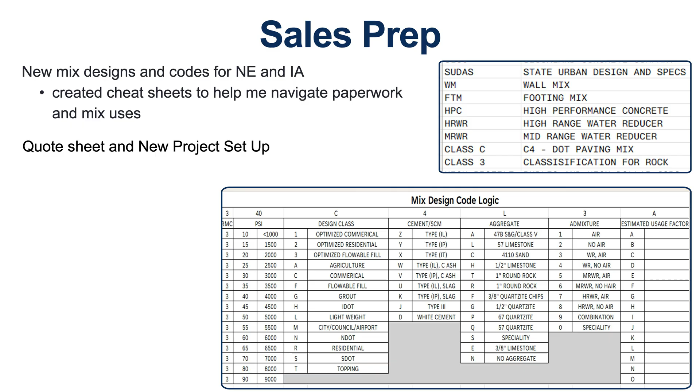So I created some cheat sheets. The one on top is just a small Excel sheet I made for myself to reference back to. The bottom one is what our quality control manager gave me to learn about the mix designs. And I got to spend a little bit of time in Omaha with the sales and estimating team.

I got to bid some jobs, go see aggregate sites, meet with some contractors in the metro area, talk about different sales strategies. How do we do sales in Omaha versus how do we do it in Sioux City, since they're 2 different size markets. One of the projects I got to be on was the Omaha streetcar.

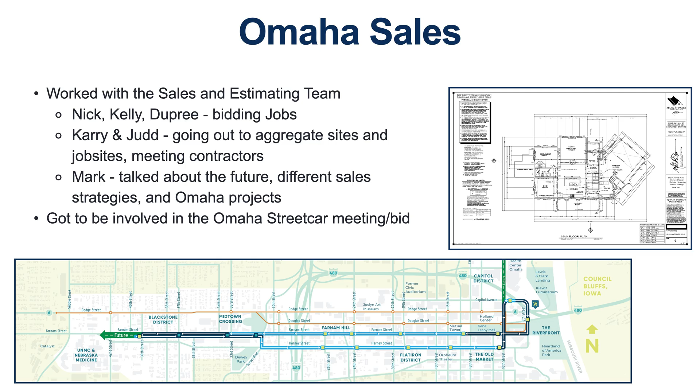It's kind of a little trolley that goes through the old market area. I got to sit in on that meeting, help Nick, our lead estimator, bid the job. So that was something cool that I maybe wouldn't get to see in Sioux City.

I spent some time in Gerhold sales, which is part of the rural division of Lyman-Richey. I spent 2 days with Carrie and Chuck. We got to drive around to different job sites, meet some of the different contractors. These were some of the cooler jobs we got to go to.

One of them being the chicken barns for Michael Foods—they're putting about half a dozen or so chicken barns up. And then the Norfolk River project, which is pretty much downtown Norfolk. It's a little canoe area where you can canoe, kayak, paddleboard—pretty cool thing to see. And then the Columbus Community College.

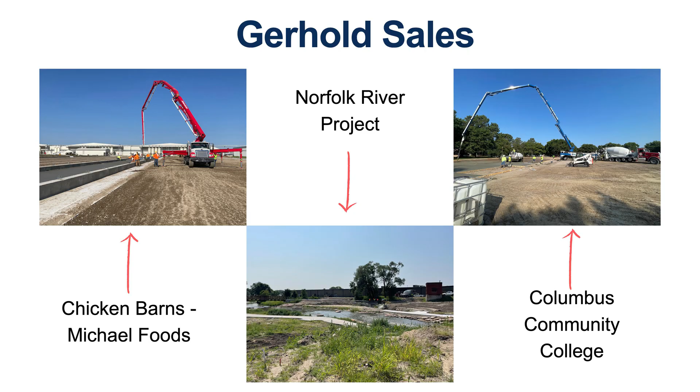Since I was based out of Sioux City, this is just a couple of the paving jobs I got to be a part of. As you can see here, we do have 2 different paving mixes. The difference in them is the different water reducers and then the different spec for slump. So your handwork is obviously going to be a 4, and your paving is a 2.

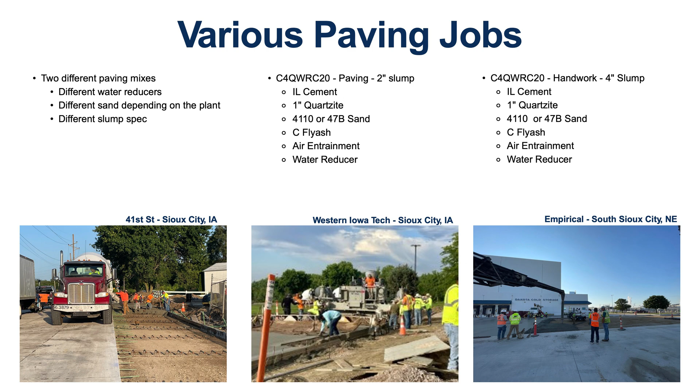Something I learned was that there's different sand depending on which plant it comes out of. If it comes out of the Sioux City plant in Iowa, it's going to be your 4110. And if it comes out of the South Sioux plant, which is in Nebraska, it'll be 47B. So even though it's the same area, it's 2 different sands with 2 different state regulations.

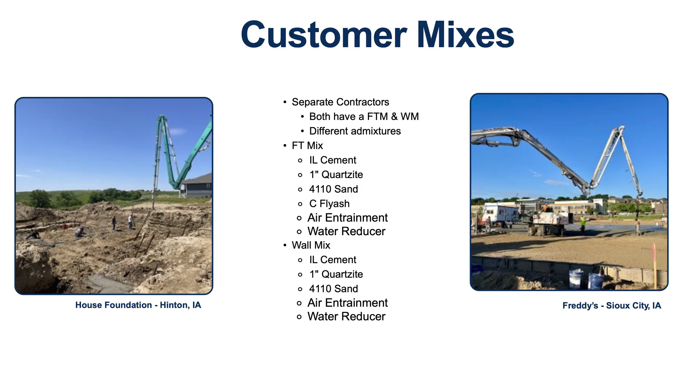Something I'd never seen before in ready mix was the opportunity for customers to make their own mixes. These are just 2 of our contractors that have a footing and a wall mix—that's what they mainly specialize in. The difference in them is water reducers, but it's about getting to learn each customer: what mix do they use, what's needed for their job, and how do they work with it. That was something cool that I thought was new to me.

This was my favorite project of the whole summer. I had never gotten to be on a bridge deck before. I've done hospitals, roads, schools, and everything in between, but never a bridge deck. So being there start to finish for the project was something fun. I went to the pre-construction meeting, met with the engineers, the DOTs, and we fine-tuned some details.

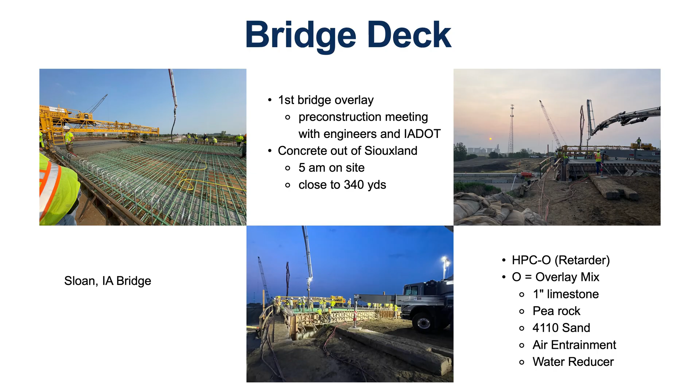Okay, when are the trucks gonna arrive? Where are they gonna park? Where are they gonna wash out? Because it was a tight area on the bridge with traffic still using it. So it was 5 a.m. on site, coming out of our Siouxland plant, about a 25-30 minute drive for our drivers, and it was close to 340 yards. They used an HPC-O, their overlay mix, and they use limestone. In Sioux City we don't use limestone, we use quartzite, so we had to have a special shipment of limestone just for this job.

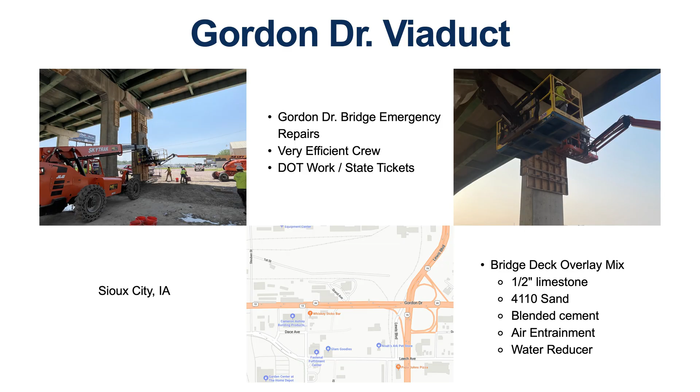And then the Gordon Drive Viaduct, this is one of our smaller jobs where the contractor orders a small amount of yardage, but they have a huge impact on what they do. This bridge in Sioux City is under emergency repair just because it's been around for hundreds of years, pretty much.

And the way they do it, the crew is very efficient. They load up concrete into these Home Depot 5-gallon buckets, lift them up, and hand them to each other. They pour them into the forms, then throw the buckets down. It's one of the most efficient crews I'd ever seen. I didn't know you could place concrete that way, but it's possible with the right crew.

And it was a state job, so I got to sit with QC and learn how to write some state tickets. They also used an overlay mix, but with 1/2-inch limestone, so it's just a different spec.

And then the Sioux City Airport, we built the new hangars for the airport. This was a couple of days of projects with 600 to 700 yard pours per day. And something I had learned was that there's 2 different airport mixes.

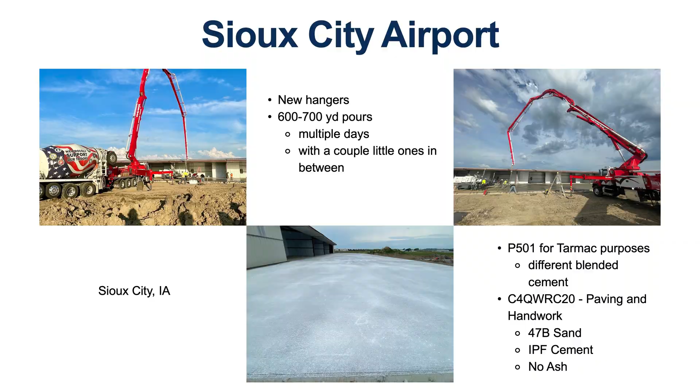So the P501 is a tarmac mix, and that's what you use if something touches the tarmac or if it is the tarmac. It uses a different type of blended cement - not IL, not IPF, a different type. Whereas for the paving mix, as you can see, they used an IPF cement with no ash.

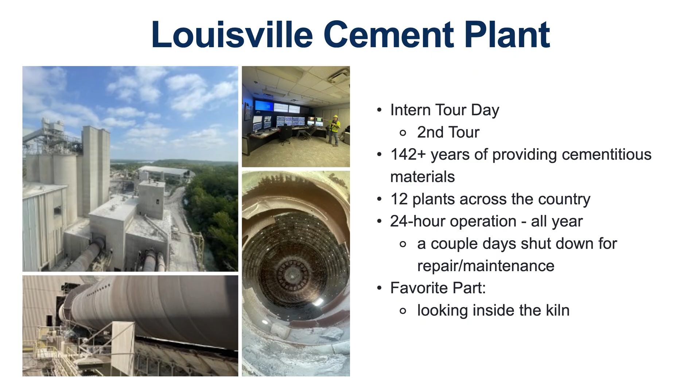And then I had the opportunity to go to the Louisville Cement Tour. This is my second time being to this plant, and a couple of things I learned this time around was that it's been in service for 142 plus years. And I knew that they had a lot of locations throughout the country, but I didn't know that they had 12. So that was something cool to learn, that they're kind of scattered throughout the northern region.

And then they are a 24-hour service plant, with a couple of days off because of maintenance and everything. My favorite part that I got to do this time around was look inside the kiln while it was running. I didn't take a picture - I did not want my phone to melt.

And so like Peter had mentioned before, we got a lot of rain and a lot of weather this past summer. So half of Sioux City flooded, which meant our yards were down, business was slow, grades were wet.

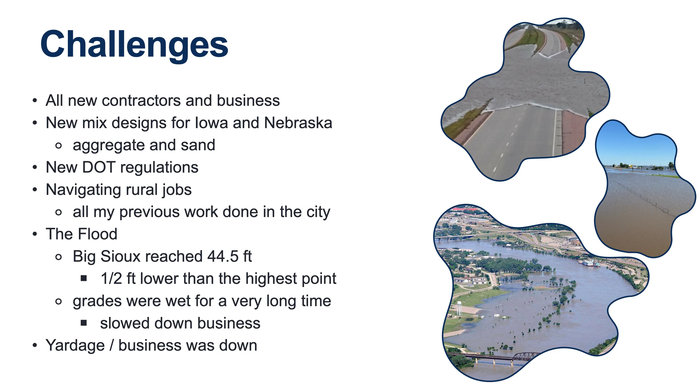As you can see, this is some of the pictures from that time, but I kind of took this as the opportunity to meet with contractors, learn the business side of things, work on the new mix designs, work with our QC a little bit - hey, what's the future look like, what are we doing - and just do some office work that I wouldn't get to do if I was out on the job the whole time.

And something that was new for me, especially working in Sioux Falls previously, my jobs were usually in the city. So this summer, trying to find a project in the middle of a cornfield, that was new and a little challenging, but we managed. And how has CIM benefited me?

Understanding of mix designs and material science, that's a huge part when it comes to sales, especially with building customer relationships - what mix do you use, what materials do you want. So getting to learn that through labs, through different classes, that's been very beneficial for my career.

And just the hands-on experience - going to the labs, going to the field trips, having these internships, and just learning it hands-on instead of behind a desk.

And then sales and marketing fundamentals. For me, it's very important to know what's our economy right now, what are the market trends, where's the industry heading. So things like that, so I can kind of talk to customers and see where they are at versus where we are at.

And then professional connections. For example, our patrons meeting that we have every year, getting to meet the owners of different businesses, some of our patrons - what do you do as a job, are you hiring - just things like that that we wouldn't get to do in any other major has been one of the very crucial and beneficial things for my career.